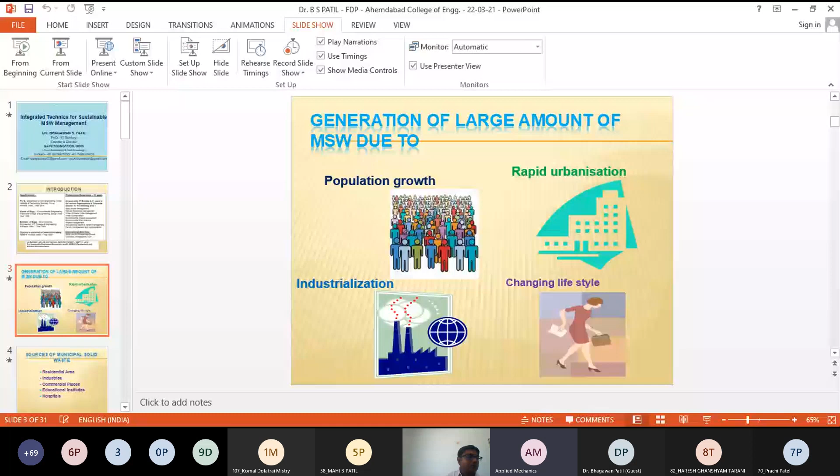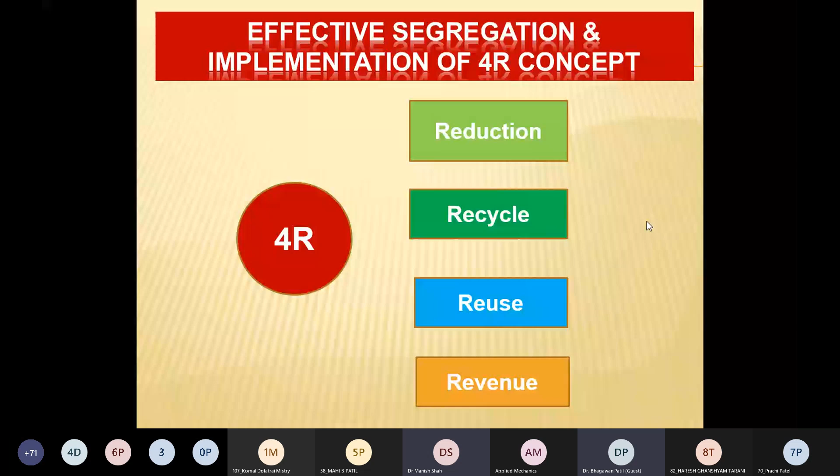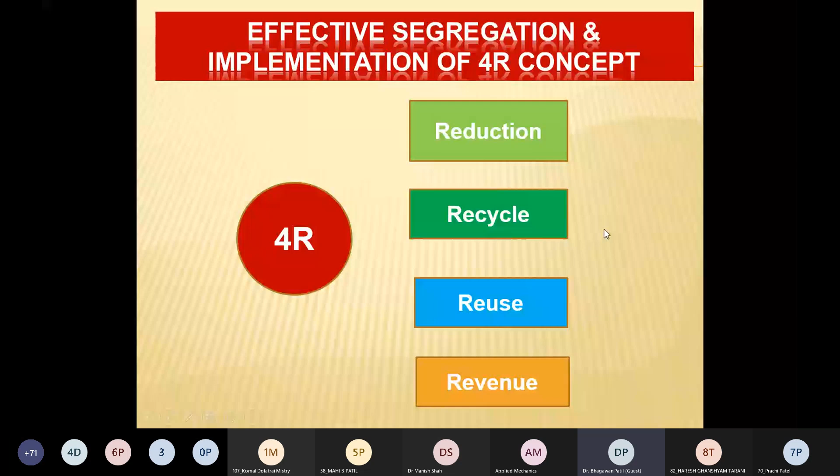These are the 4R where we can reduce the total quantity of municipal solid waste. Once you reduce the quantity at the source, that automatically results in reduction of transportation cost, treatment cost, and the final product coming out of it. So after the 4R, effective segregation is also very important to reduce all this cost in the process of municipal solid waste treatment.

Segregation - everybody knows this is not a new thing. Start segregating at the source only, that means from the home. Every municipal corporation tells people to keep 2 bins - one for wet and another for dry. But I want to add a few things, because awareness is still not there in our society, and people's mindset is not there to segregate into two compartments.

Many things need to be segregated as wet municipal solid waste at the source. Generally there's a lot of confusion when we say wet waste and dry waste. Suppose someone says food waste comes under wet waste - then what about garden leaves? Where will that go? Dry garden leaves - so we can divide into two categories.

One is compostable waste, another is non-compostable waste - or which decomposes and which does not decompose easily or fast. If you divide it into these two categories, and increase awareness among people, try to change their mentality towards segregation, that will help a lot.

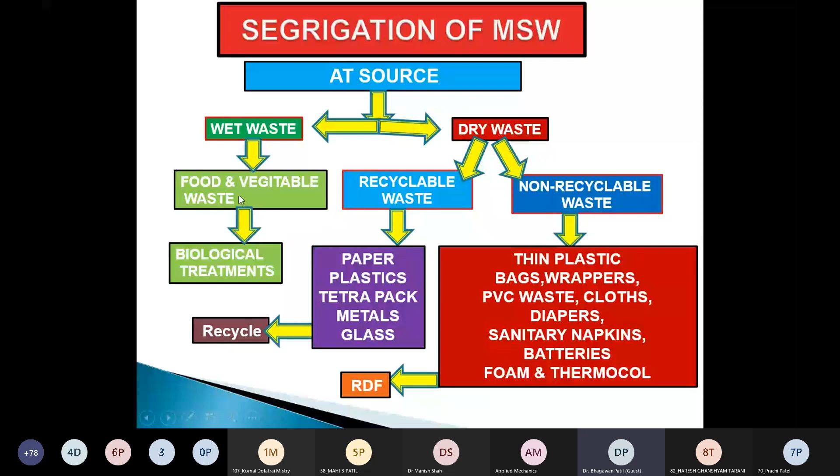This is talking about segregation at source. Before going to centralized collection systems, I want to mention the dry fraction coming out of MSW, which we mainly refer to as Refuse Derived Fuel, RDF. Generally RDF is used for waste-to-energy plants, and we can convert that into electricity also. But many things determine what makes good RDF—energy enriched, combustible, high calorific value, lower moisture content, and lower ash content.

But if you see our municipal solid waste, I already told you it needs to be combustible with high calorific value and low moisture content. Actually, during rainy season, it's very problematic related to moisture content, and that automatically affects the calorific value also. When we go to the thermal process, we'll discuss much more about RDF.

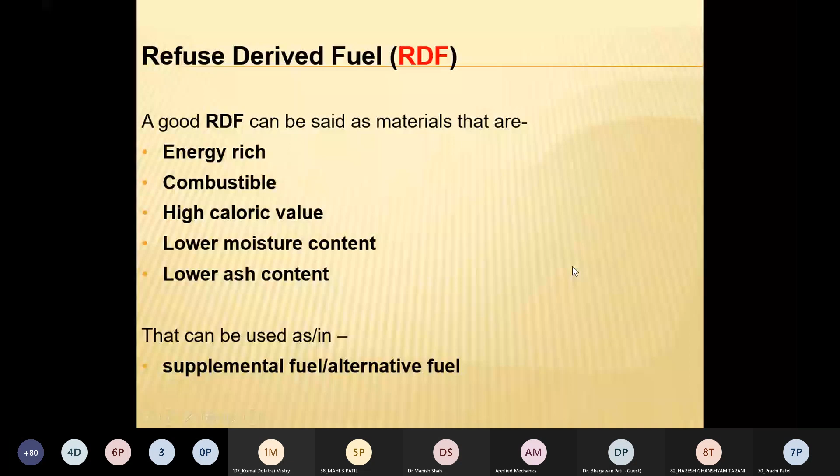These are the composition of the non-decomposable fraction and plastic wrappers—this is related only to RDF, which comes from fresh waste, bio-mined waste, and hand-picked waste.

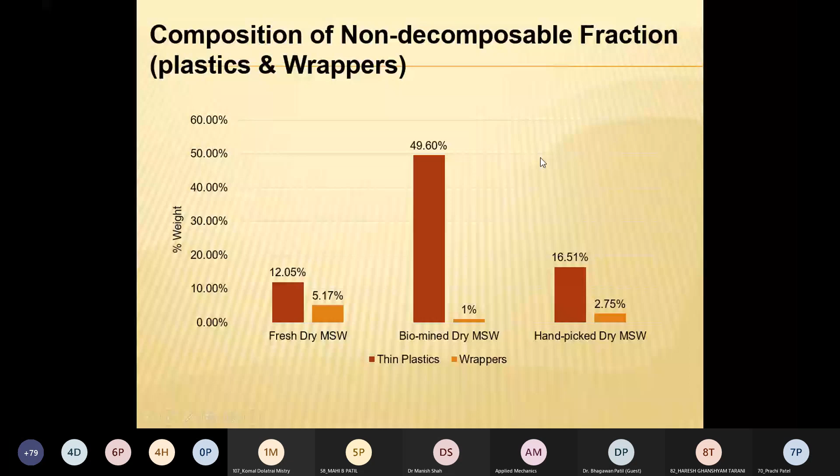Actually, if you want to treat our municipal solid waste effectively, integrated techniques are required here, because one technology is not sufficient to treat the complete municipal solid waste. In many places, mixed waste comes for treatment; in many places, segregated waste comes for treatment. So when these two types of waste come, there are three major processes here.

One is the mechanical process, another is the biological process, and the third is the thermal process. If waste is not segregated and combined waste comes along with biomass, then it should first go for the mechanical process, which separates it into different categories. If segregated waste is there, it directly goes—if waste is segregated into combustible and non-combustible, or decomposable and non-decomposable, then the decomposable part goes into the biological process, the non-decomposable component goes for the thermal process, and the remainder goes into SEBLF, the sustainable engineered bioreactor landfill. In all these technologies, when you see the integrated technologies, every technology has limitations.

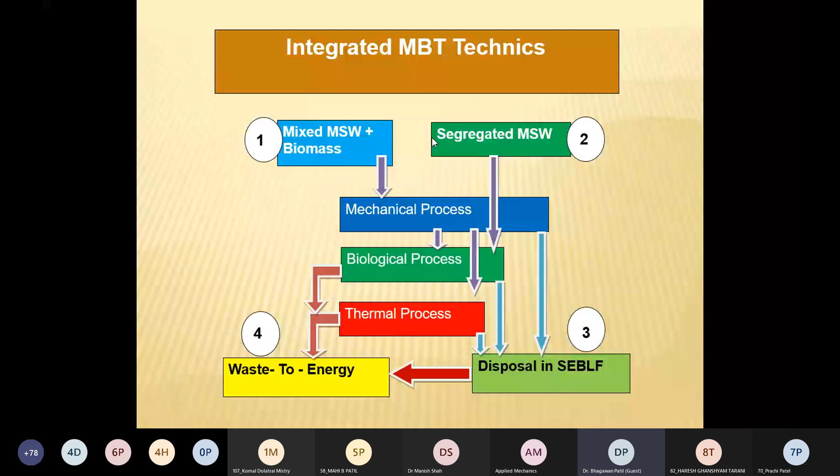If you start with the mechanical process—a completely mechanical process—material goes into the unloading platform, then metallic separators are there, then it goes into the conveyor. Before that, in many places shredding takes place, then it goes into the conveyor, where by air blowing they separate the lighter material like plastic and other things, while the heavy material remains there.

So if you see the complete mechanical process, everything is mixing together. If you segregate manually, wet waste goes separately and dry fractions go separately. But if you use the mechanical process, only the lighter material can be separated by air blowing systems, while the remaining things stay mixed.

So if you send it for biological treatment, that creates a problem. If you send it for thermal treatment, that creates a problem. If you send it to bioreactor landfills, the decomposable organic matter will decompose, and the remaining material will remain as it is. So these are the limitations for a complete 100% mechanical process.

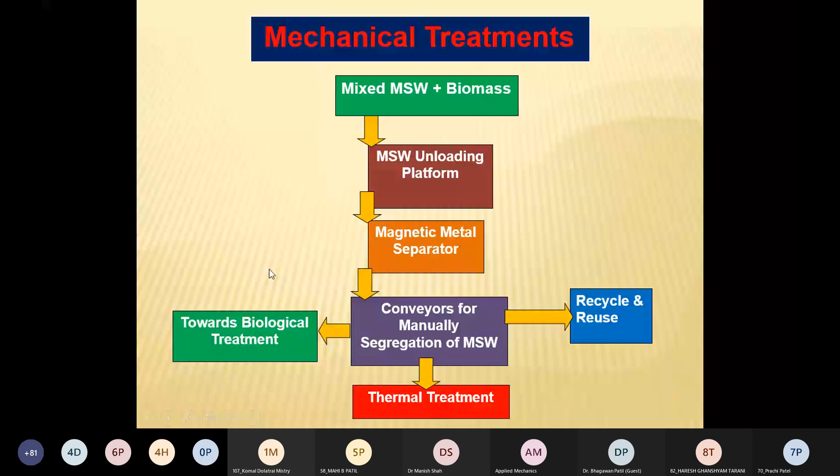Many alternatives are there for biological treatment, because if you separate wet waste or decomposable biological waste, you can treat it by composting or by a biomethanation plant. Two technologies are there—both crude and very good technologies.

Only limitation is whether the councils or municipal councils have enough land. Composting requires big lands. If lands are available, they can easily go for composting. If there are land limitations, biomethanation plants are a good alternative because they require comparatively much less area for treating wet waste.

From wet waste, the biomethanation plant gives us biogas. We can send it directly for cooking purposes, supply it to gas engines to convert into electricity, or even by purifying the biogas, convert it directly into CNG.

All these technologies are available based on how much quantity of waste is generated. Because if you want to go for CNG, the biomethanation plant minimum capacity required is 5 metric tons per day and above. Below 5 metric tons per day capacity, the biomethanation plant is not viable for a CNG plant.

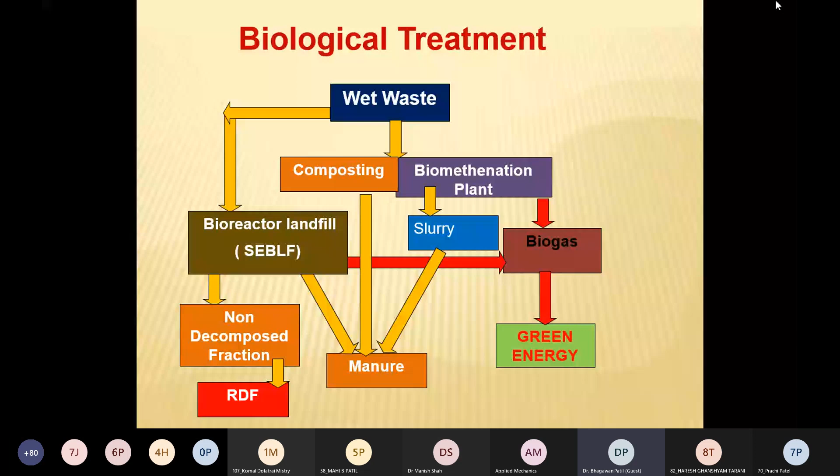So next, after biological treatment, already I told about the biogas plant for segregated waste. These are the composting units - this is already constructed at IIT Bombay, this is a small quantity, but this can even be done at large scale also.

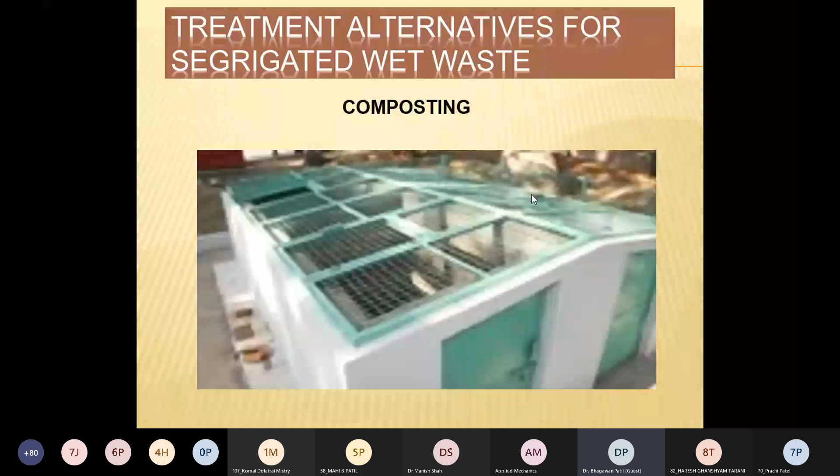Biomethanation plant - already I have mentioned the revenue generation and other things, how much quantity of biogas generation is taking place, conversion into electricity, and revenue generations. So all this shows it is a viable technology for the wet waste biomethanation plant.

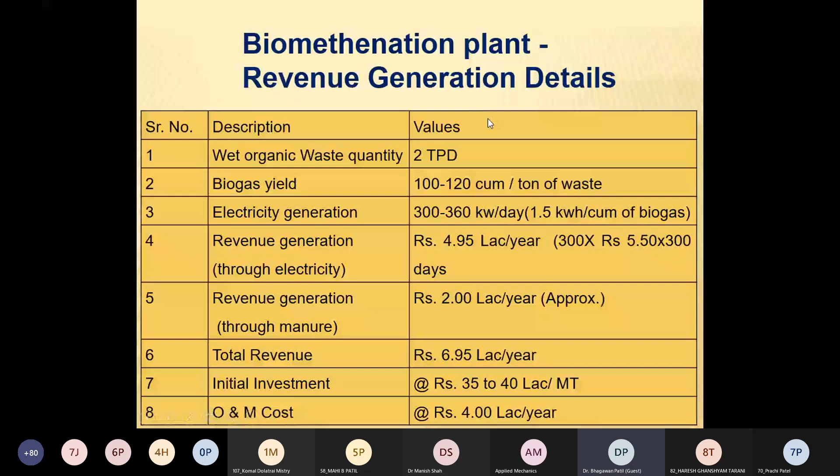Then thermal treatment. Already I told that fresh, hand-picked RDF, and plus biomass also. Another thing is, in the municipal councils, biomass generation is taking place because many trees are there, garden waste is there. So all these are nothing but biomass. We can use this biomass along with the RDF.

This is the thermal treatment where moisture reduction is required, because to effectively run the boiler, moisture controlling is very important. Once we reduce the moisture content, then we have to feed the boiler. Already I told we can generate steam through the boiler, and through steam turbine, electricity.

Then the ash which is coming out from the boiler will go into the bioreactor landfill. This is the thermal treatment.

Till date, not much work has taken place in thermal activity in India, but in other countries, a lot of development has taken place long back in thermal treatment for dry fractions or RDF.

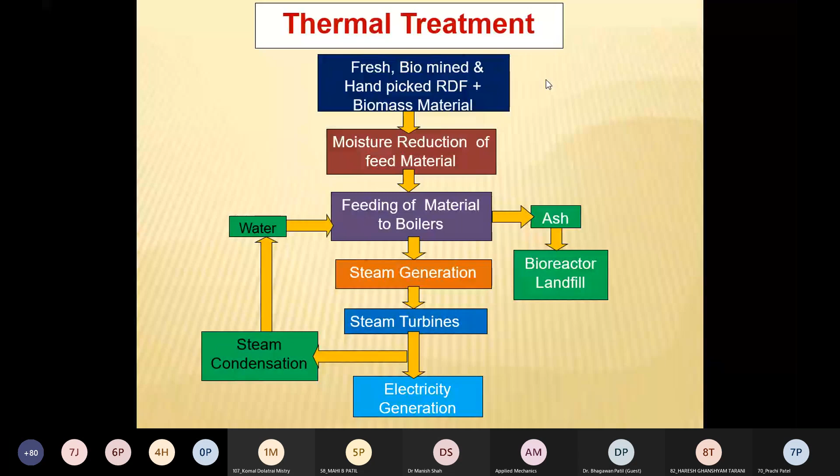After thermal treatment, already I told that different types of boilers are available. Only conversion is required. Already in other countries, they have done the conversion and they are using these types of boilers.

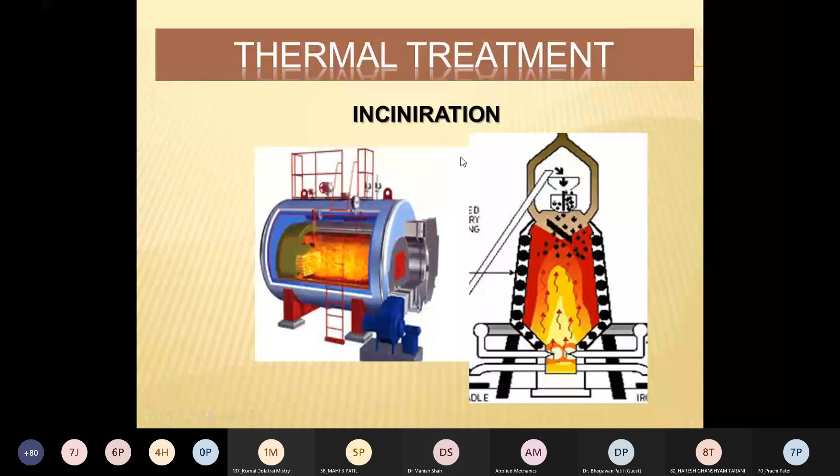If we try to apply this technology in India, municipal corporations on a BOT basis, involvement of private agencies is required. We have to start with small townships. Small townships can develop their own plants also.

I am already working on this. That's why I interacted with many people on boiler development activities and processes. So if you roughly see...

Incineration ranges from 10 TPD to 500 TPD. If you consider 500 TPD of municipal solid waste, electricity generation will go up to around 2 megawatts per day, and plant cost goes up to 30 crore. I am talking about the 500 TPD capacity.

But actually, a lot of work we have to do on this. Already that activity is going on, and this is a very good solution where land or space limitations are there, because the dry fraction quantity, the RDF quantity, comes up to 80%.

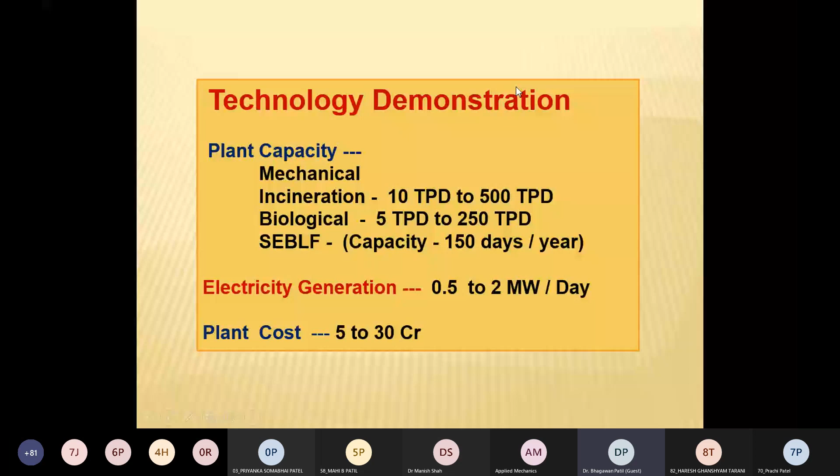Then this will be possible. This is possible in other countries, already I told that. Before that, I want to share one more technology.

This is biomass to energy. Already I told that biomass generation is taking place in the municipal councils, and this is also separate, because if you segregate, generally trimming of trees and plant cutting, then dry leaves, everything is stored separately.

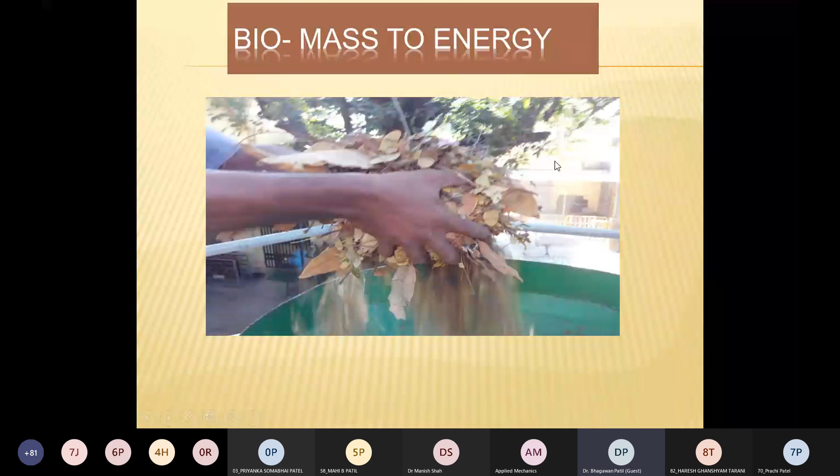But till date, proper treatment and disposal facility is not available. Everything is going to the dumping ground. So if we treat this separately, then we can convert this biomass into energy.

This is a schematic representation of the plant where we can convert biomass into electricity. We can feed the biomass from here. This is pyrolysis of the biomass. Ash is coming down, and produced gases generation is taking place over here.

Everybody knows the composition of the gases - CO, H2, methane, CO2. These are present in different percentages in the produced gases. Through multiple cyclones, cleaning of the produced gases takes place.

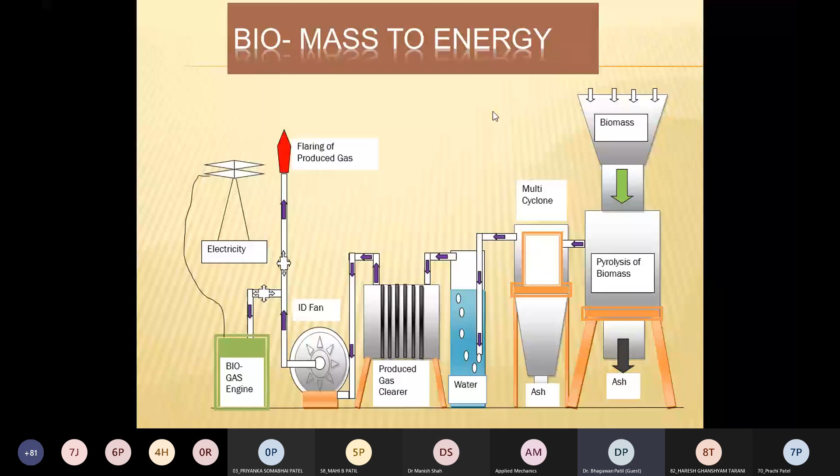After cleaning, the produced gas is supplied to the biogas engine, and through the biogas engine, electricity generation takes place. Already we have run these trial plants at IIT Bombay. Commercial plants are also available in the market.

This is a small activity we can also do for garden waste - converting it into pellets used for the gasifier. Stoves are there, chulhas are there.

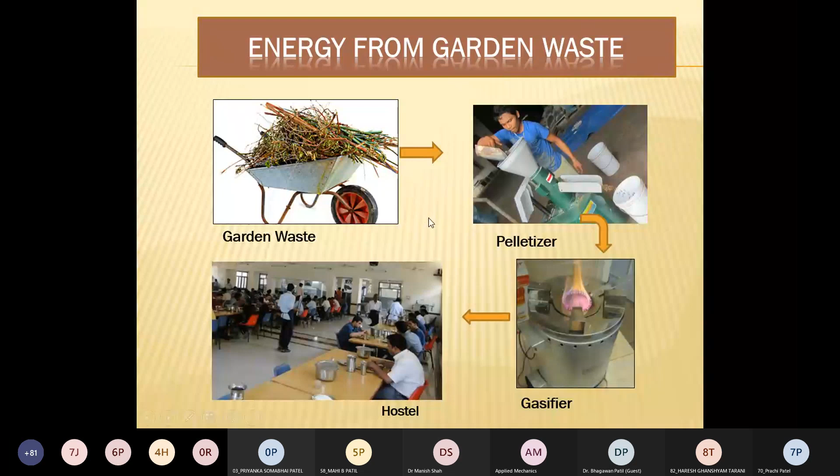Another thing, during segregation, a major component coming out is plastic. There are many technologies right now being used to treat plastic waste, but one thing they do is produce oil out of it.

This is a schematic representation, already this trial was taken at IIT Bombay. This is plastic, shredded plastic, then catalyst. Through the catalyst, by heating, separation of oil takes place, and the non-condensed gas is flared off and taken here.

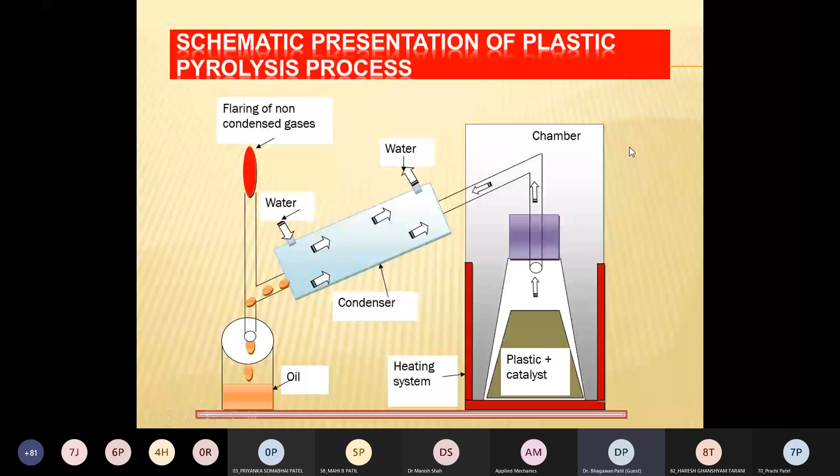This laboratory setup was run by me at IIT Bombay 4 or 5 years back, and this type of oil extraction was done. This is used as furnace oil in boilers. Many NGOs are doing this and supplying it to remote areas for lamp and chimney purposes.

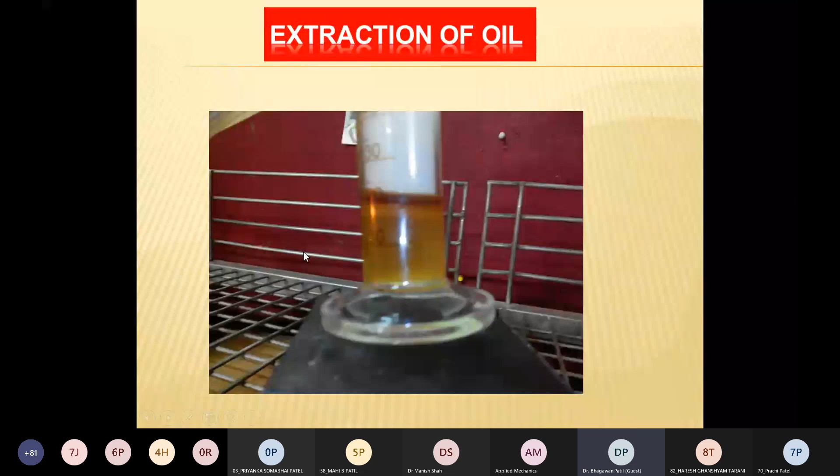Commercial plants are available right now in many places. They can convert plastic into furnace oil, and they sell it to boilers for incineration purposes.

But still there are limitations for this, because a variety of plastic comes in, and contaminated plastic comes in that needs to be segregated.

Another issue while running the plant is temperature control, which requires proper management. If temperature control is not done properly, wax formation takes place in between, and once wax forms, all the piping gets choked. So we have to stop and clean that piping again. These are small issues, but many people are still trying this.

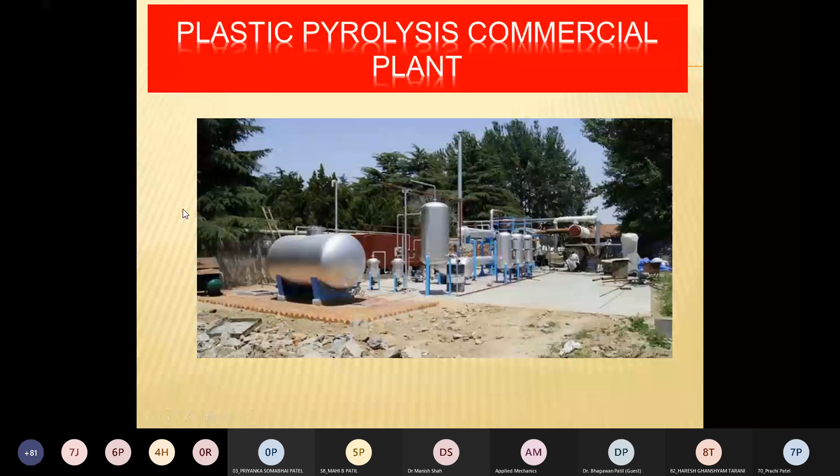When I took the trial, these were the technical details. In the lab setup, I took 70 grams of plastic and 30 grams of catalyst, and started heating in the setup.

Above 110 degrees centigrade, moisture comes out from the plastic material. When we go from 150 to 350 degrees centigrade, combined moisture and oil come out. When we send that to the condenser, the moisture condenses into water and separates, and clear oil comes out.

Pure oil and wax formation takes place between 350 and 600 degrees centigrade. Then the material that doesn't condense, that fume, goes for flaring because it contains combustible gases also. So these are the data here.

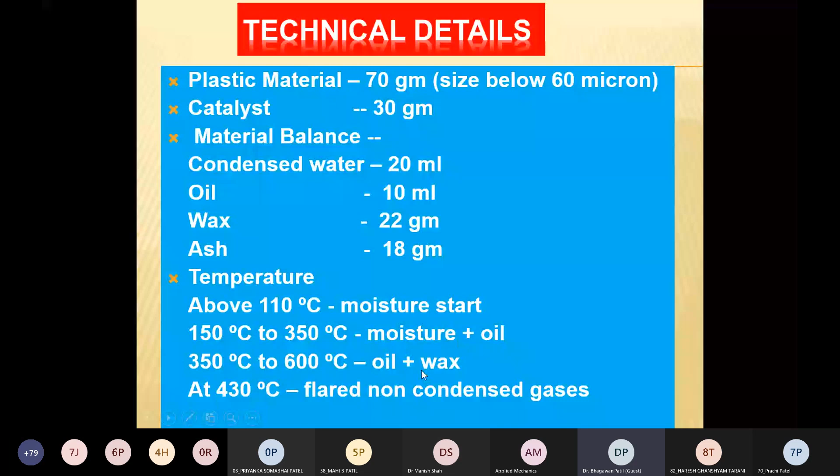I have done the trial and it works very well. We can convert that easily into oil. But we have to check the temperature, because between 350 and 600 degrees centigrade, oil and wax extraction takes place.

For the last 15 years, they have been running this plant very effectively. This is possible in India also, because one plant in Delhi, run by Jindal, is operating, but that plant has a lot of limitations due to the composition of the municipal solid waste.

I already mentioned the US composition and Indian composition. Specifically, Delhi's composition is also a typical composition, which is why the Jindal plant is facing a lot of problems, and a lot of allegations are coming against them.

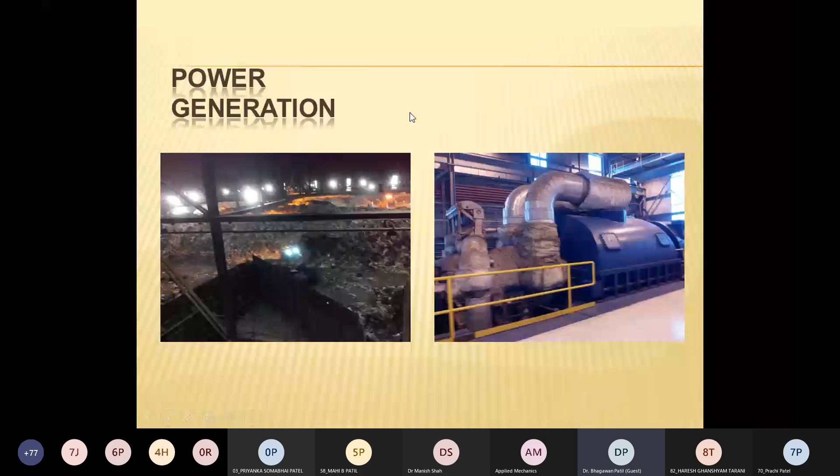These are the inside photographs of the power generation plant in Philadelphia. They have taken environmental precautionary measures, these cyclones and all these things, which are mandatory for these plants, because we have to take care of the environment also when going for any advanced or new technology.

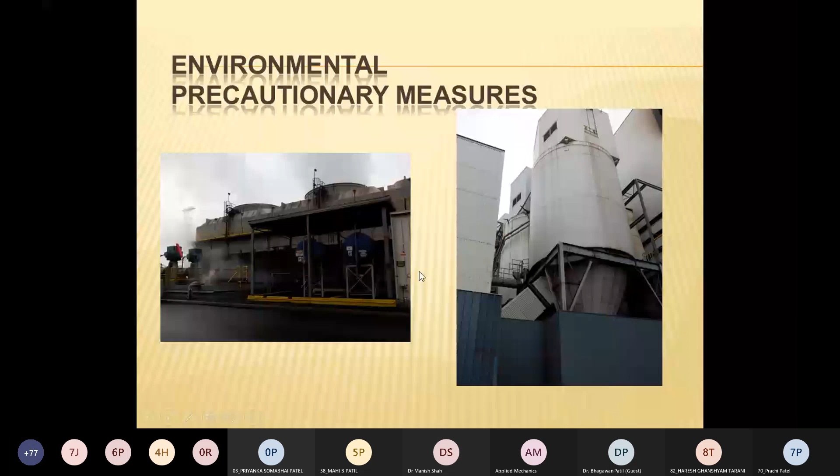So these are different integrated techniques available. We can implement them into municipal solid waste management in different ways as per the quality and composition of the municipal solid waste, localities, availability of land, and cost. Many components come into play during the selection of integrated technologies.

So friends, after that I want to request all of you, what can we do for our society? First, for awareness of segregation among people, we have to form environmental groups in our society, villages, colleges, and try to make people aware of segregating municipal solid waste effectively, because effective segregation will greatly reduce the load on the treatment facility.

Involvement of the public awareness programs. We have to run segregation programs into different places along with different bodies, insisting people to avoid plastic use. This is about reduction and active participation of youngsters in these segregation awareness programs. All this will help a lot in the effective treatment of municipal solid waste.

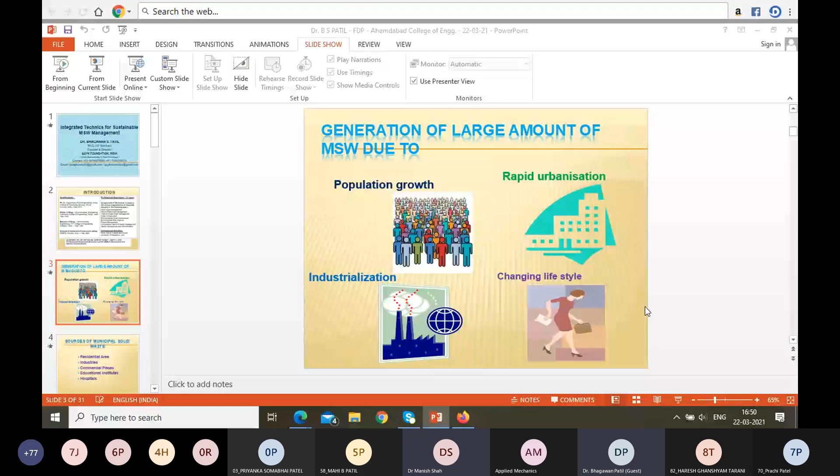Hello. Hello. Hello. Hello. Yes sir, am I audible? Yes sir, yes sir.

So when we are collecting this waste, actually the waste is of different periods also - there is 10-year-old waste, 15-year-old waste, 20-year-old waste, and so on. When we are collecting this waste, our aim is to convert it into some sustainable fill material. We have also worked on using this segregated municipal solid waste as a fill material for reinforced earth walls.

Now our observation was that particularly when seeing this Pirana waste, I found that all the waste is being dumped at one place and hardly any on-site segregation takes place before dumping. Second, when this waste is dumped, due to seasonal changes and biological or other decomposition taking place over time, a lot of internal changes occur, and particularly in rainy season we found a good amount of leachate collection, which is mostly dark brownish or dark blackish in color.